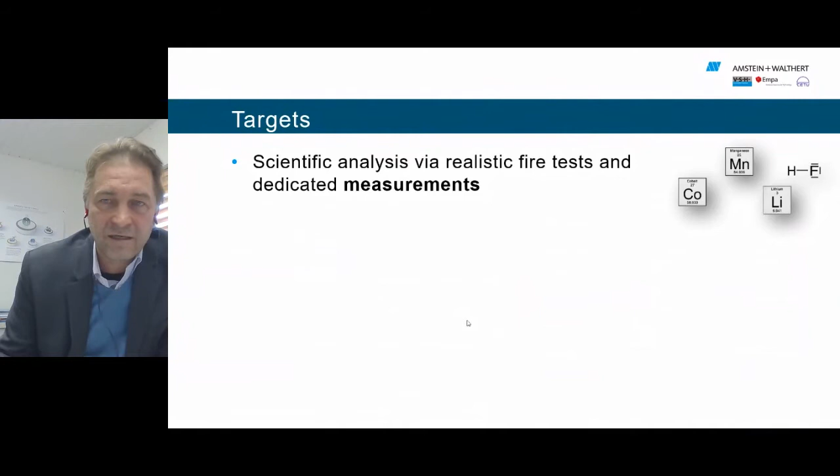Now about the motivation driving this expertise. We were looking forward to a scientific analysis of realistic fire tests with dedicated measurement. It was about an experimental proof, an empiric approach, and we wanted to deduce the impact to underground trafficated infrastructures based on the influence of electric mobility, and from this derive technical and organizational measures to prevent or mitigate potential damages.

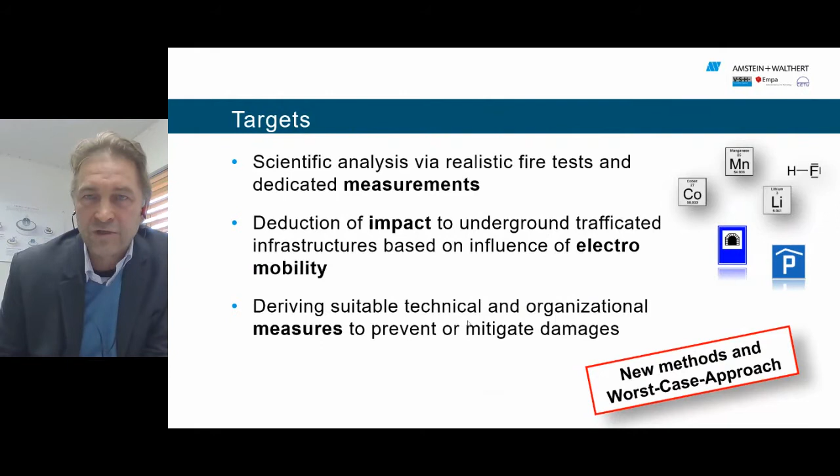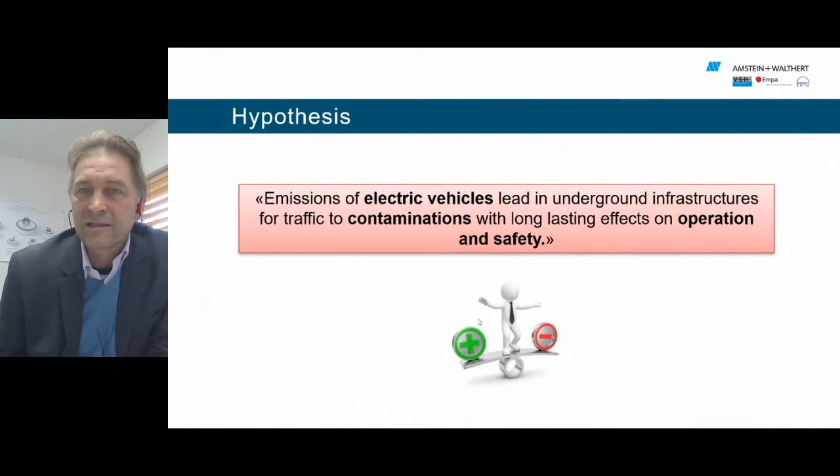This was a new method, starting from a worst case approach. We could not study all the different topics, but the target was to go for a worst case approach. Our hypothesis was that the emissions of electric vehicles in an underground traffic infrastructure lead to contaminations that have long-lasting effects on operation and safety. We wanted the experiment to confirm if this is true or not.

So the approach we had: let's reduce the whole investigation compared to traditional vehicles. We have also the electric vehicles, and see the main difference - standard things around are the same, it's the battery itself. So let's focus on the batteries.

Investigate a single module - let's have a completely new battery on this, make sure that we can scale the results back to a realistic vehicle at the right level. And in this case, concentrate on the fire emissions, not other topics.

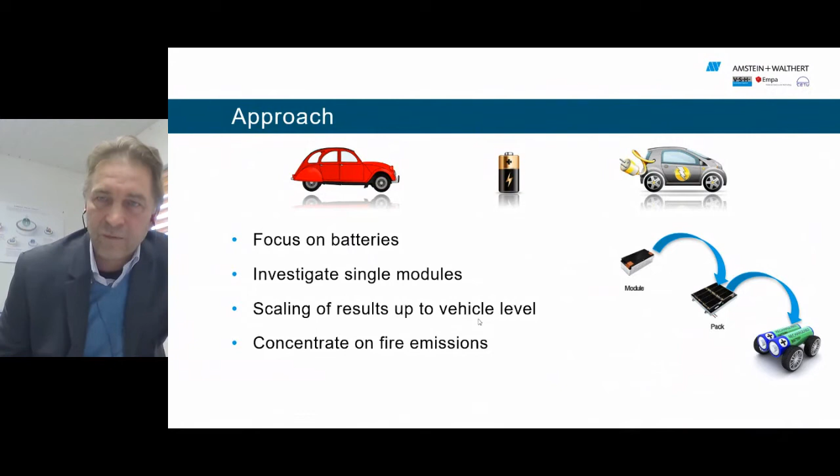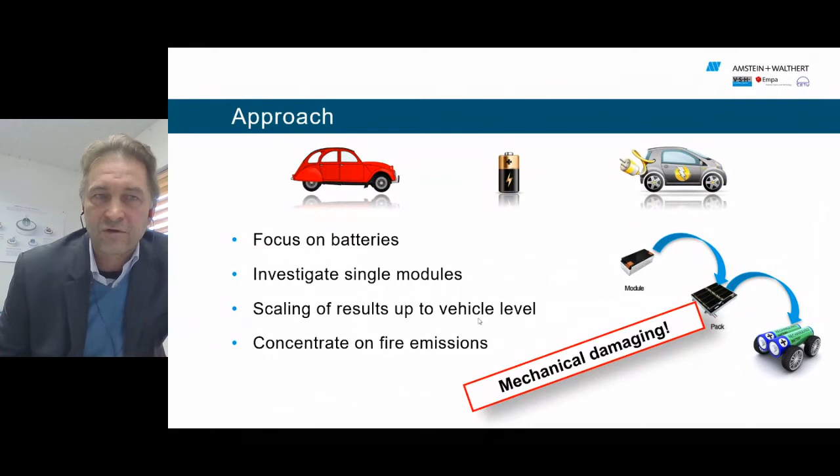So how to approach this? We took a single battery module and mechanically damaged it to force and cause the thermal runaway. The test material was a module of 4.15 kilowatt hours - you see a picture of this type of module. We bought a new battery of a pure electric vehicle, and the typical temperature where the thermal runaway starts is about 210 degrees centigrade.

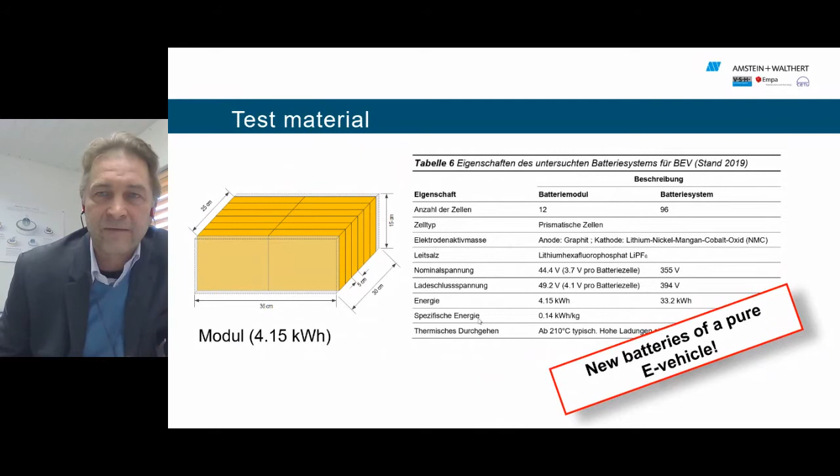We forced the start of the thermal runaway with a special method using pyrotechnology. We basically put a plate on the battery, and in a very controlled way with an explosive, we caused two knives to penetrate all batteries at the same time, achieving maximum destruction and causing the thermal runaway of the batteries.

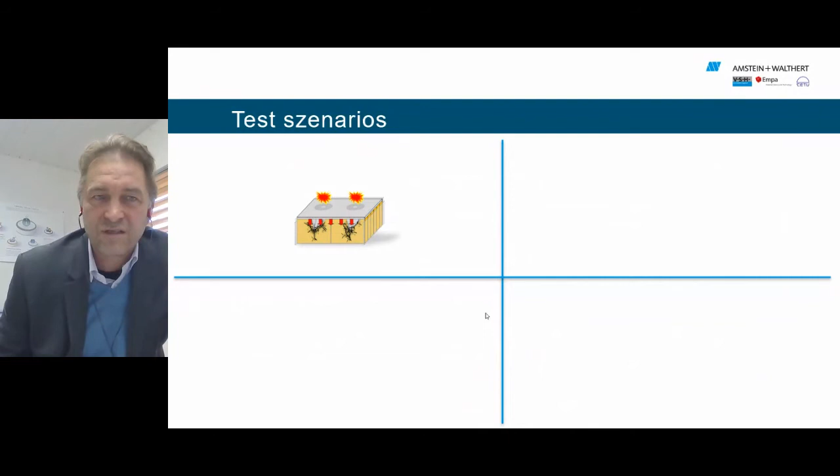And then we investigated this in an environment as infrastructure, wanting to see how the deposits are - be it on the surrounding, be it on the wall of the tunnel, in a closed environment, or if there are protective clothes, what does this mean.

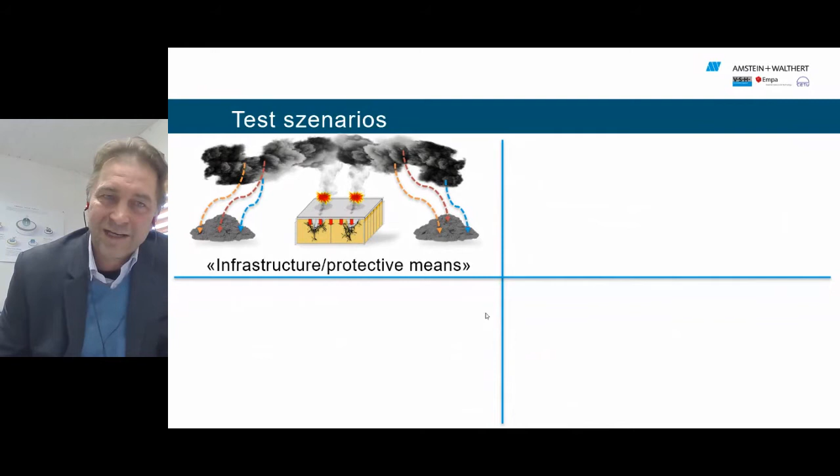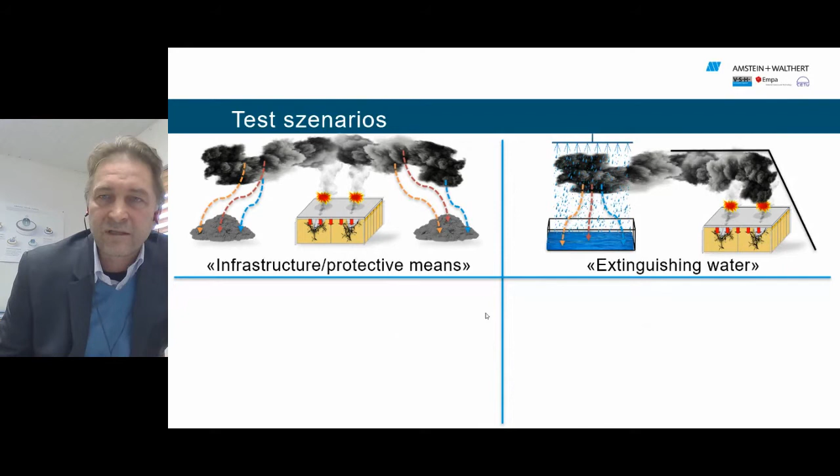Then we wanted to analyze the effect of the emissions or chemicals in the smoke on the extinguishing water, and also on the cooling water used at the end to get rid of the battery itself. We also wanted to see in an open ventilated tunnel how the propagation of these potential dangerous chemical emissions takes place, and to do this in a quantified way.

In the first experiment, we already saw that we have a lot of emissions.

We did not quantify them, but we wanted to see how long the persistence of these emissions, potential dangerous and toxic emissions, would last. And of course, we make the material analysis also post-mortem. This is what I want to present you today.

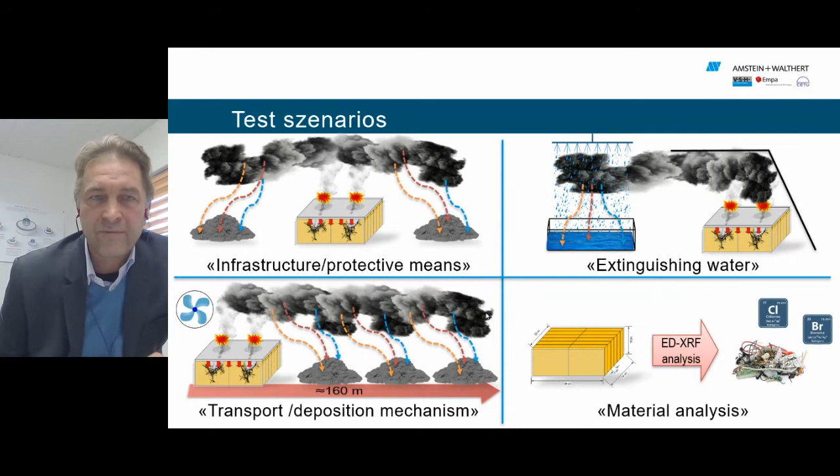The environment we used, we were here in the Hagerbach Test Gallery. We selected two areas. One was a tunnel piece with a volume of 250 cubic meters, completely closed with no mechanical ventilation. We just had a sucking machine that was filtering out the emissions afterwards.

This helped clean things out before we released it via our standard tunneling ventilation system outside. Important was that the volume we selected was a scaled volume, because we wanted a reference toward a larger environment, like a parking garage in a closed setting, and the release rate known from the battery if you fully destroy it. So the module we used is 1/8 of a full battery from a vehicle, which corresponds to 1/8 of a parking level — about 250 cubic meters — where we wanted to study the emissions.

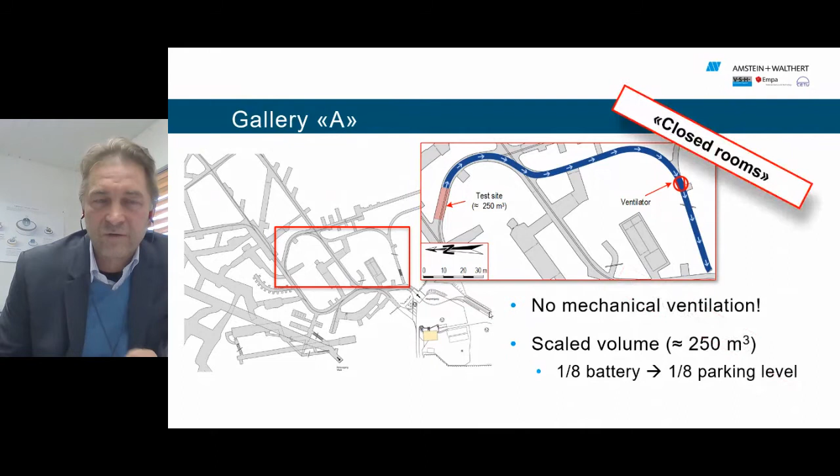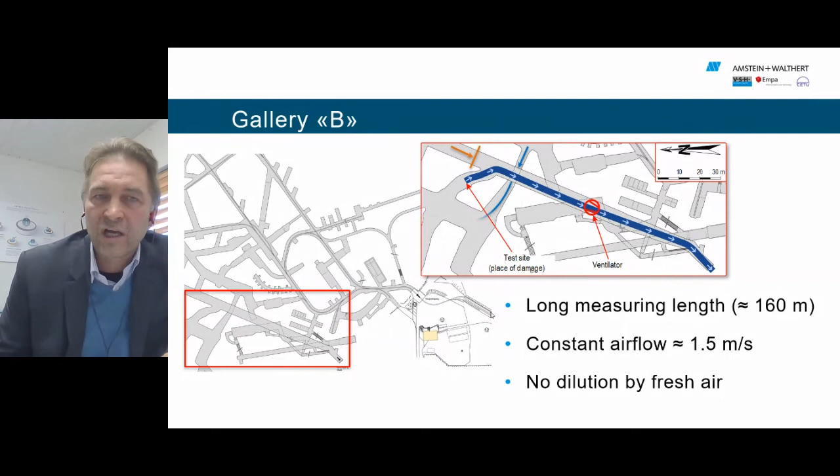This was the closed room scenario, where we made two tests. The other test was in another sector of the gallery where we had controlled ventilation, so we could see how the propagation took place with 1.5 meters per second constant airflow along a 160-200 meter long tunnel, with no dilution from fresh air coming from another side.

Now, first of all, you see here the scenarios with some real pictures of how we set this up in the closed tunnel, then in the firing tunnel — the open tunnel — and the post-mortem picture of how the battery looked after the destruction.

Now I give back to the regie to put in a small video. It takes about 2 minutes, and then we will continue.

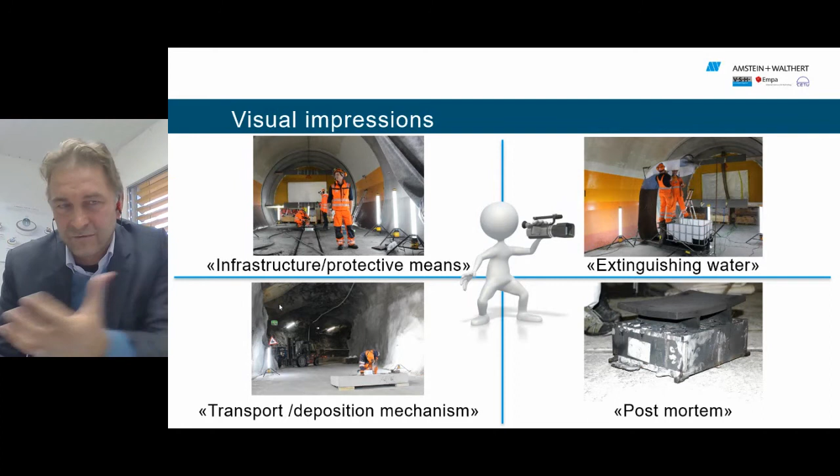Now, in the analysis, as I said, we selected a lot of data. Basically, if the thermal runaway of just the module already takes place — not even speaking about the full battery if that in total would start — this fire source is really strong and the effect is spectacular.

We also see high temperatures that lead to the vehicle fires, but the good message at this point is that a vehicle fire remains a vehicle fire. So the standards that are set fully apply, they don't need any change. There's no change expected in the design and the expectations.

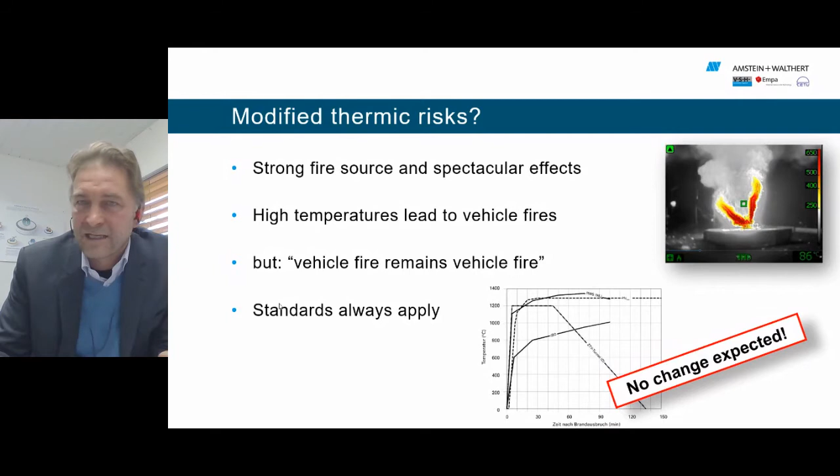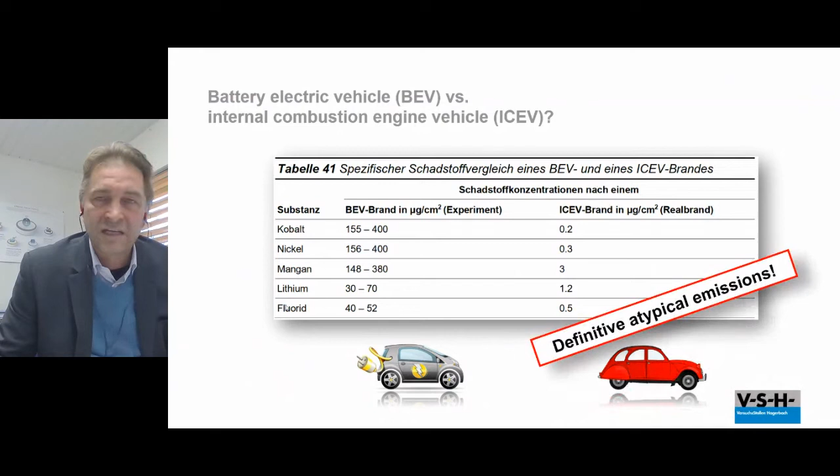However, where we see a clear difference is in the emission of special substances. In particular, in the closed environment, you see here the comparison of an internal combustion engine vehicle, a standard traditional vehicle, compared to a battery electric vehicle in the closed case. These are atypical emissions that we find, and they require special consideration.

How about the environmental risk from air pollution? Compared in the closed environment experiment to the open environment where we had air ventilation, there is of course a high dilution of these emissions, and they are propagated along the tunnel, diminishing the farther away you go. However, the amounts detected are still considerable, and they remain persistent over years.

The experiments we did two years ago — we studied this at the beginning, and we still found significant amounts of this material, which we also analyzed in the experiment. After such events or accidents, you need proper cleaning. The good news is, if you do the standard cleaning as you would for an accident with fire in a tunnel, you can really clean it. Afterwards, you won't detect it — so compared to a new or regular tunnel, the residues are not found anymore. So this is definitely possible.

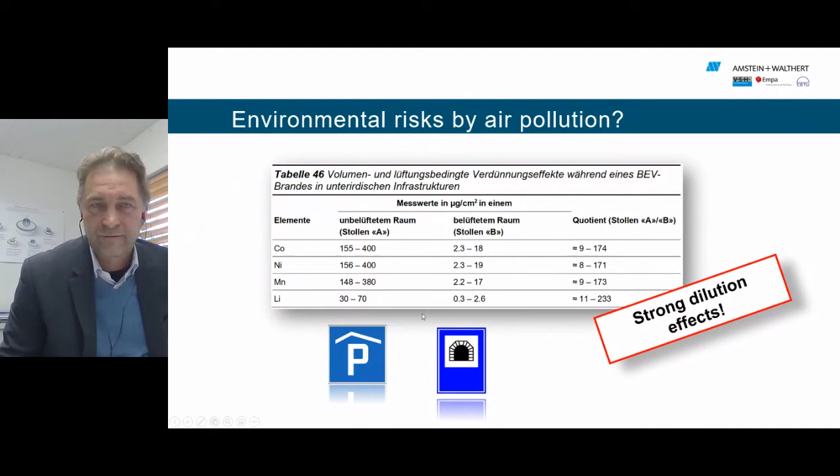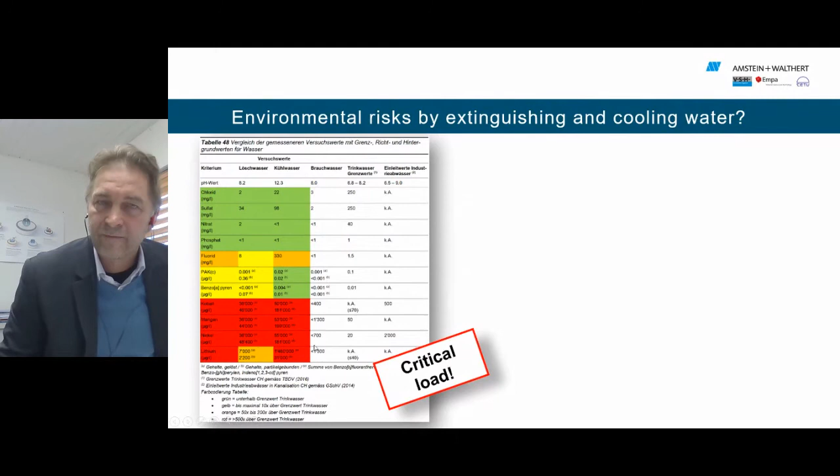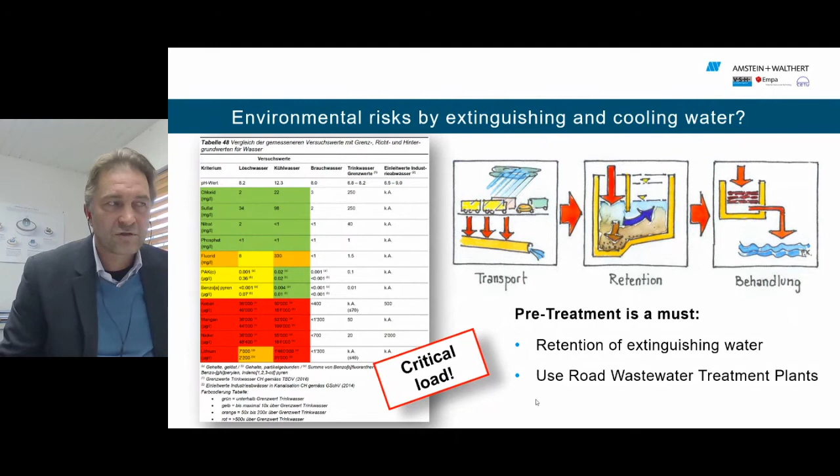What you see here is the environmental risk - there are critical loads. In this table, apologies for the German, the full report is in German, but you see cobalt, manganese, nickel, and lithium. These amounts are found in the extinguishing water and also the cooling water, in considerable ways. They are clearly detected, so there is a need for pre-treatment of the water in use, be it the extinguishing water or the cooling water itself when disposing of the vehicle after the fire. The recommendation is clearly to consider the use of road wastewater treatment plants.

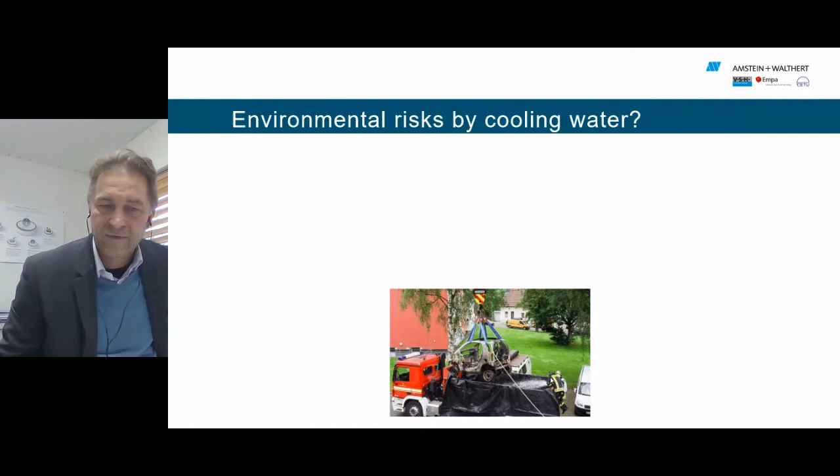We see there are also environmental risks for the cooling water, because a standard method to keep thermal runaway under control is to cool it down extremely. In the extinguishing water, the pH value compared to standard reference water was not changing much, with negligible increase of electrical conductivity. However, if the car or battery is cooled down and kept in cooling water, over time this significantly changes toward a very high pH value, and the electric conductivity also increases extremely.

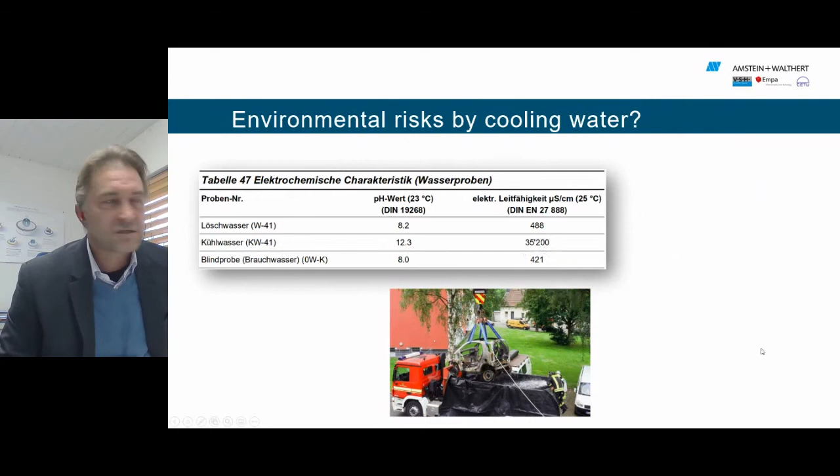This shows that there are new risks that have to be considered and should be harmonized in the requirements accordingly. So for the result, what happens?

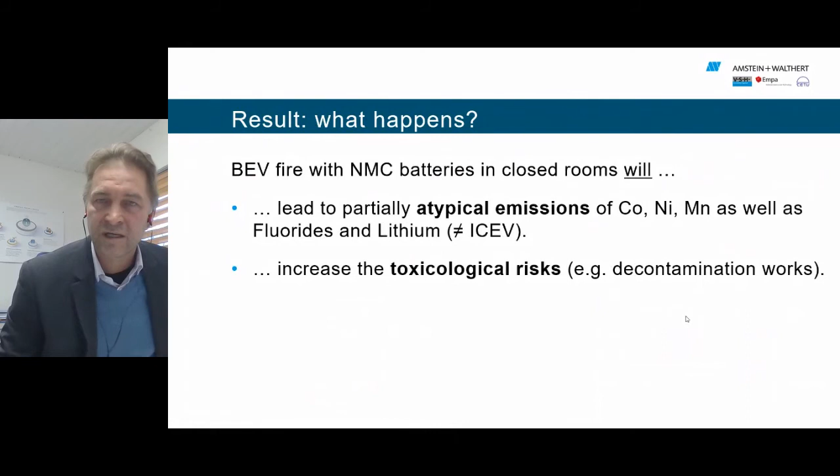Battery-driven electric vehicle fires with lithium NMC batteries in closed rooms will lead to a partially atypical emission of cobalt, nickel, manganese - the core cathode elements - as well as fluorides and lithium. This is unlike standard vehicles. They increase the toxicological risks, which needs to be considered for decontamination works. It can be decontaminated, but it needs to be considered that these elements are present and stay present. This makes it relevant that differentiation is made between extinguishing water and cooling water and the treatment thereof.

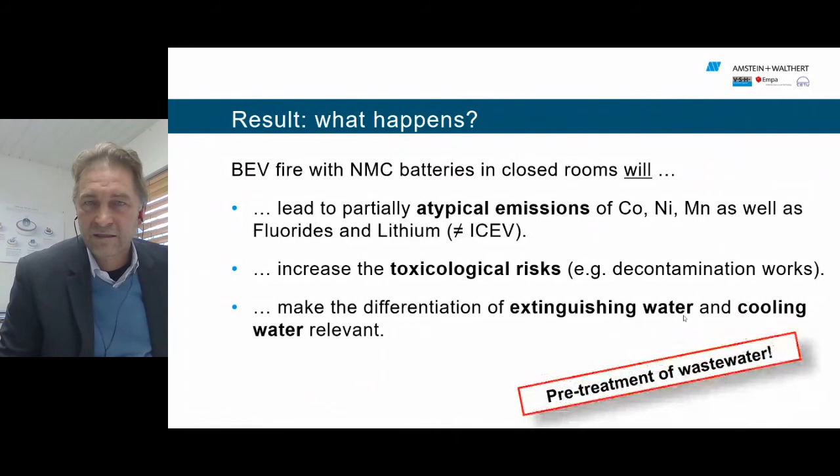As a result, pre-treatment of the wastewater is absolutely necessary.

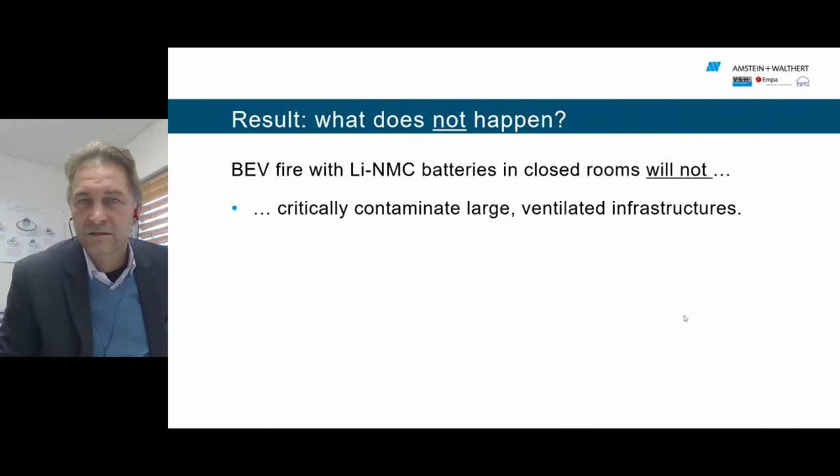The second thing we can also say - what does not happen - is that in closed rooms this will not lead to critical contamination in large ventilated infrastructures, causing an essential change in accident management. So it will not change a lot in the standard procedures already established for how to behave in case of an accident, and it will not lower the value of availability for the facility. So keep following and implementing the state of the art - that's the important thing. Do what is required in the proper way, and don't take this too easy. This should be taken into consideration.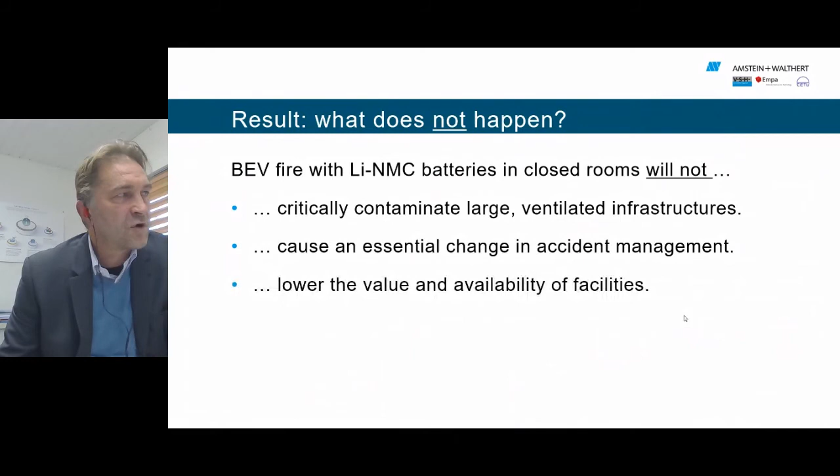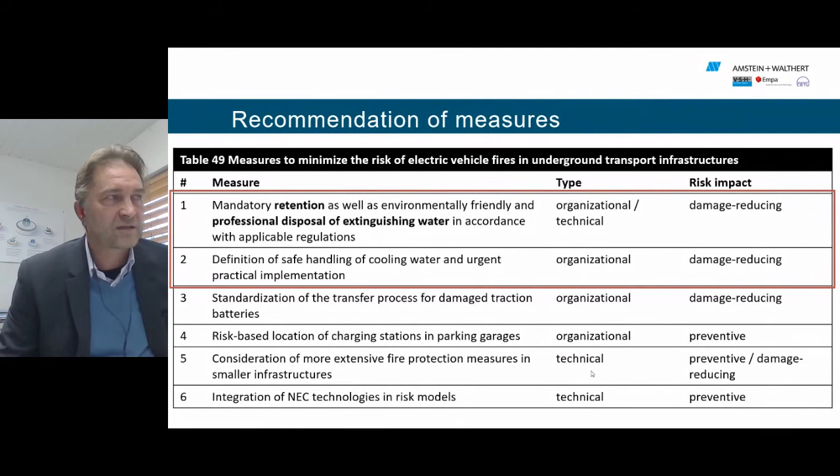Now, as a result and recommendation of measures, the project came up with 6 points, and I think the first 2 are the most urgent ones. It should be mandatory to have retention and professional disposal of the extinguishing water in accordance with applicable regulations. Also, the definition of safe handling of cooling water and urgent practical implementation is an absolute must, and in the future should be better described and implemented in all procedures and requirements.